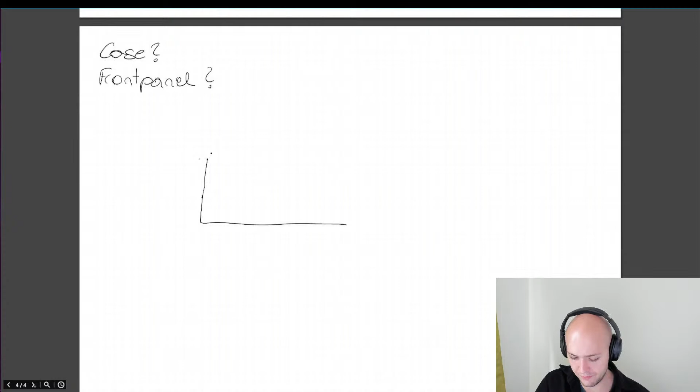We have decided that we want to build an LED controller with kind of a tilted case. If it has this part on the corner, who cares? But it will be some kind of case with an angled front. That's always pretty neat. And what I want to try out, because I haven't done this before, I want to do a front panel PCB. I want to do a front panel, and I will add a PCB behind that panel where I will mount the buttons. So if this is a cut through our enclosure, on the bottom there are the standoffs which are almost always available on such enclosures. We will have there a PCB where all the power electronics lie. So everything that produces a lot of heat will have the option of convecting and cooling itself down.

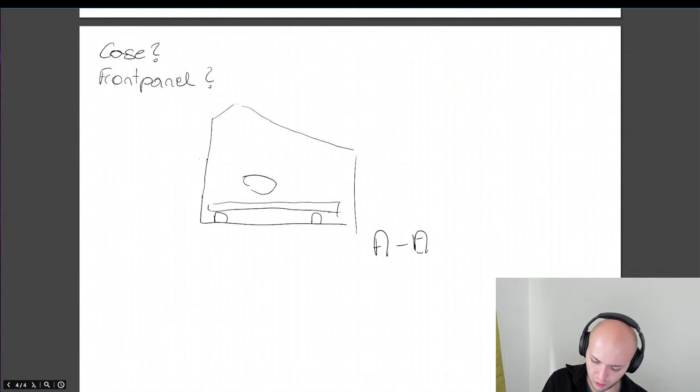Then we will add our front panel, make it a little bit thicker. So this will be our front panel with all the buttons and whatnot. I will draw it differently. We'll draw our front panel like this, and this. And we'll have a PCB with some kind of standoffs. I just realized standoffs have gotten extremely expensive. I never had to buy many of those. And behind that front panel, I will keep the colors. Straight lines don't matter. And behind that, we'll have our PCB, where the buttons and the knobs will stick through, like that or like that.

We didn't specify this before, but the buttons and whatnot don't have to be of high quality. Of course, we could use real switches like those in a keyboard. Those keyboard switches are great, and I would even have some in stock, but at another location. As you notice, we had another location. The postage service did mess up quite a bit, so I was a few weeks without live stream, or 2 weeks, doesn't matter.

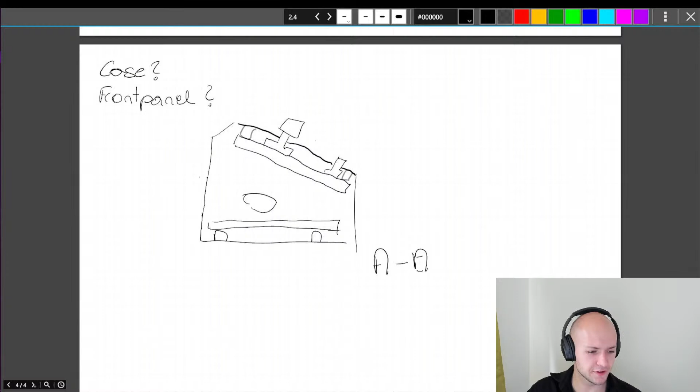And between here and here will be some connector. And if we build it like this, there is one very critical space. That is this one. Because most cases don't give you an easy way to specify this length. Of course, you only use sine or cosine, angle, no problem. But this height can be critical, especially if you are using bigger connectors. For example, I once had a project with this arrangement where we had big front panel stuff, and that can be quite critical if you have densely built your device. But I think we will be fine because we don't have really big devices. We can do almost everything on PCB. We most certainly do everything in SMD.

We will do everything SMD, but not the front panel. The front panel will certainly be through-hole technology because there is no need to do SMD. Maybe a multiplex or something, but that doesn't matter. So we're going to take a look on the market of front panels now, or not front panels. The market on

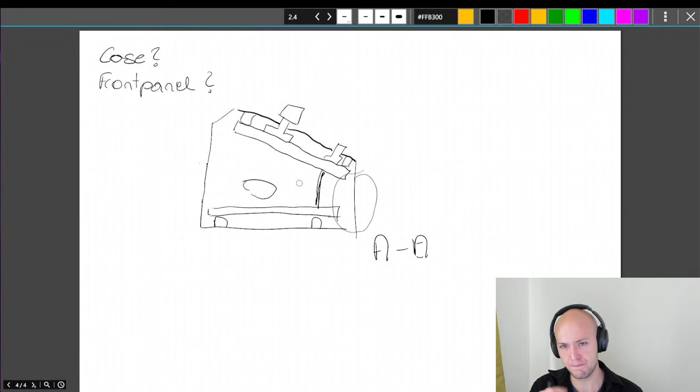Another point, yes. LEDs. What I thought to do, I will do the following. Actually, that's a point where I want to use SMD on the front panel. I want to put the LEDs, the indicator lights, on the front panel PCB. Of course, they will be. And the front panel itself will have no electric stuff.

We have some sort of cutout or some sort of transparent material at that stage. That now sounds pretty complicated, but it actually isn't complicated at all, because you can play around with the copper. If you use a PCB for the front panel, which I certainly do because designing PCBs is okay, I don't need to go to any other program than my EDA package. That is certainly easier than doing something different. It simply is. Okay.

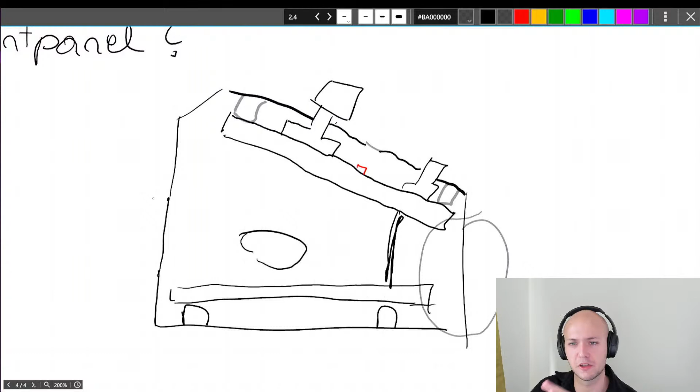So now we can take a look on the market of enclosures and find out what's working or not. Of course, I'm always somehow prepared for the live streams. Otherwise, it feels pretty awkward. And for that, I'll show you how I think you can get a pretty good impression of the market for enclosures. So let me change the. So yeah. That's what I want.

You go on Google, you search for enclosures or the specific kind of enclosures, and then you go on shopping. For example, in Germany, for the enclosure, I will use a German supplier. I will tell you why in a second. Search for Pultgehäuse and go on shopping. And now you get a pretty good overview of nearly every supplier and at least get a feeling of what's available and the price range. In preparation, I first searched the suppliers themselves. And of course, Bopla, Teko, Hammond Manufacturing was another one. Nobody else comes to mind currently.

And we see there are different kinds of Pultgehäuse, of angled enclosures. First of all, we got these very slick ones, obviously designed for battery enclosures. These are also available in a little bit different form, but unfortunately they don't have a front panel by themselves. I would use these if I had a customer who asked me, hey, I want to have a foil display. It's very easy. You search for a supplier for foil displays, you give them the manufacturing data, and then you can simply glue that in.

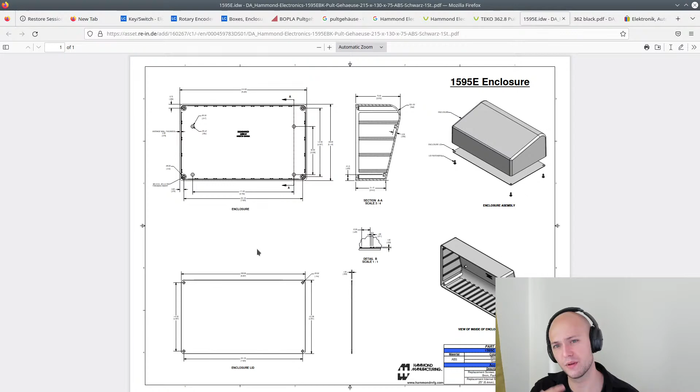I want to get a data sheet to see if there is a bigger difference between those. Which size we use is not that important at this point in time, because we will start building the front panel, or designing the front panel, and designing the power supply circuitry, and then we see which kind of size we will have to work with. Because this is a fun project, we don't have to do so much cramming in and so much try-harding to let our electronics fit - we build something nice. Okay.

One minor annoyance with most of these cases: they have such PCB holders inside them. That's very unappreciative if you want to add some kind of connectors to the back. Normally you think about having a flat surface to add your parts to, because a flat surface is something very appreciative.

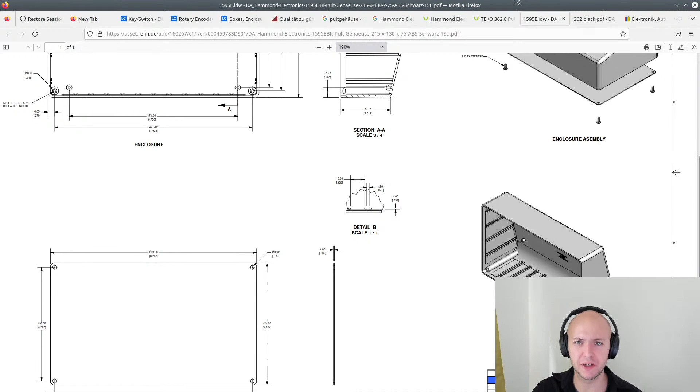With the Teko enclosure, I searched in advance, if I remember correctly - you get those too, but you get way less. So at this enclosure, it gives at least the impression - let me check something - it at least gives you the impression that we are okay with you putting some connectors in. You don't have to grind the whole back of your part. That's something really appreciative, but that's one kind of enclosure I want to use.

Let's talk a little bit about the kind of series Teko, I don't know, 362 series - I'm not quite sure. Let's take a look at how they are numbered. Of course, I already prepared that, because I have actually no real overview of the Teko market itself.

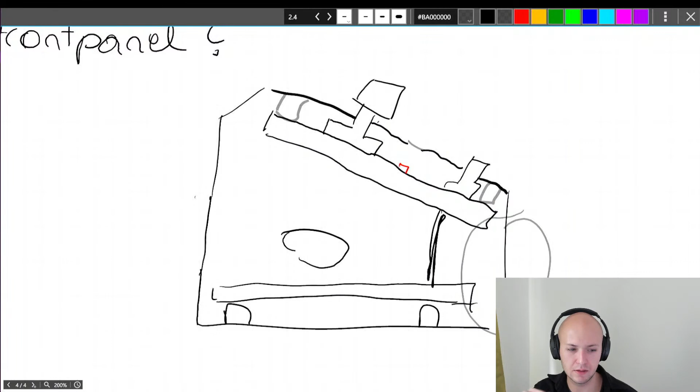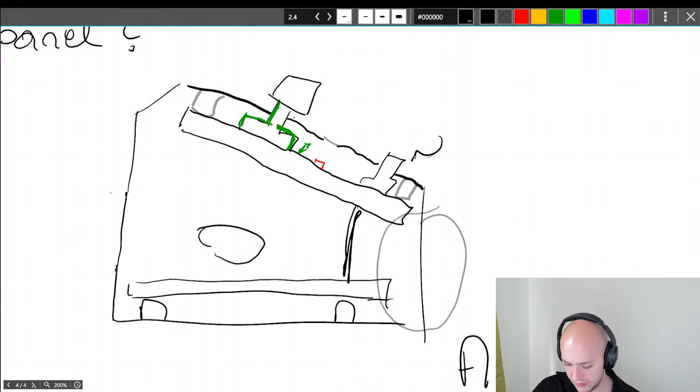Good, the next part would be to find out - a very basic constraint we have is here, because in this area, this part here, so the rotary switch that we're going to use, or encoder, we will build it in to change the RGB values. Very basic idea. But using this kind of arrangement, we need to make sure that the buttons - we have this height by the rotary encoder, and we want to make sure that these buttons here, because normally if you draw them nicely, they look somehow like that.

You have some sort of, yeah, we don't need to use SMD, but they look somehow like that. We need to make sure that this height here, that this button is able to stick out of a PCB. So I have found this correlation.

Based on that height, we can make out what kind of LEDs we need to use, how they spread the light, the angle. What kind of angle? No, that's not the right word. Yeah, we can choose the right spot angle for the LED. Yes.

No idea how you call it in English, I will not look it up. Yeah, to prevent the LEDs from shining on multiple indicator areas. So let's work on that. Let's change.

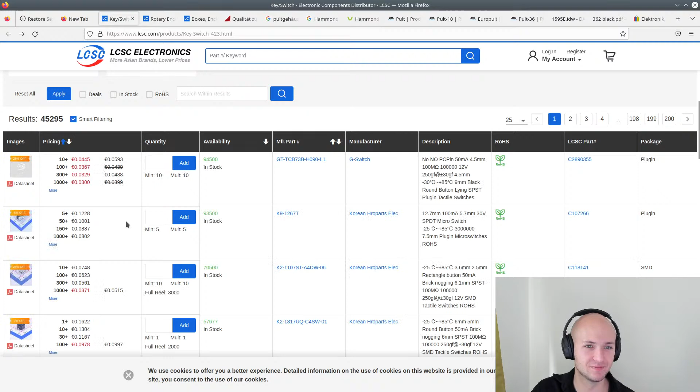Are we in the right... Oh, we are not in the right panel. Rotary encoders here, the price is set up correctly, yes.

So, of course, there are also some quite small ones. We don't care about those. We will go simply by the picture to find the right one, because we want to stay in the relatively cheap area, but we don't want to skimp too much.

So that actually could be a part that we're going to use. But it looks like the shaft looks too small. Size matters in that case. That could be a part because the shaft is long enough so it protrudes a bit, that's okay. That could be an option.

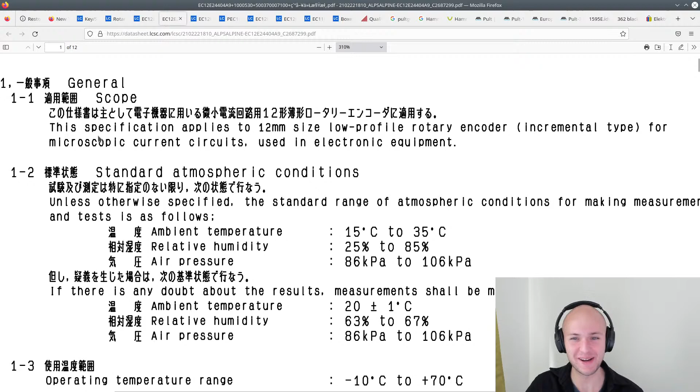Okay, it's built for microscopic current circuits. Let's only use microscopic currents. There are mechanical drawings. Everything's electrical.

Unfortunately, it's... Nope, no idea. That's really unfortunate. Please tell me it's in millimeters. Yeah, it is in millimeters.

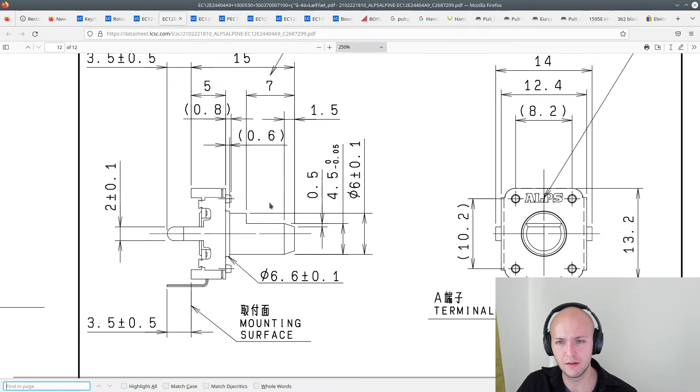That would be a good option, I think, because we have 15 millimeters, not too much. Well, it's allowed to be 15 millimeters because it still needs to protrude the front panel.

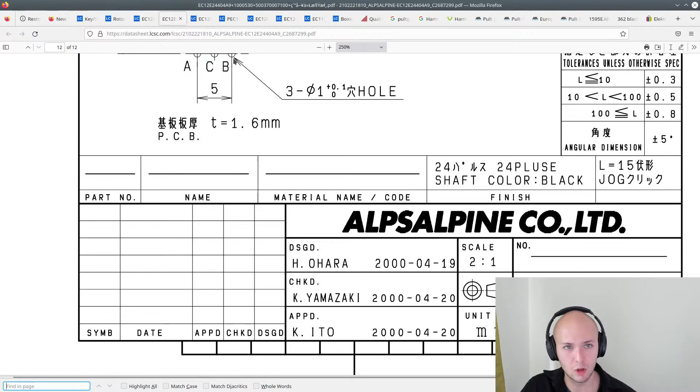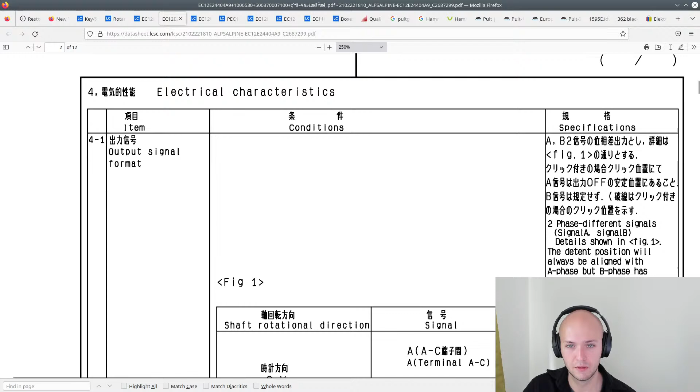Wouldn't see why we can't use that part, but I want to see if those are detented or not. Let's take a look. The detent position will be... Okay, it says it's detented, 24 pulses per 360, okay.

Sliding noise bounce.

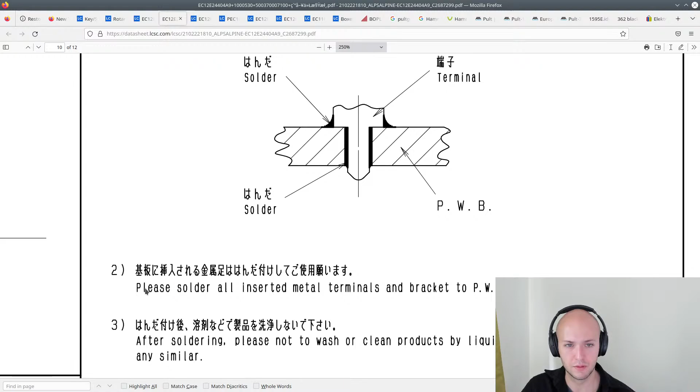Okay, no information, no. We got some soldering instructions, that's okay. Yeah, no real information, unfortunately, or nothing I found. No description. And these, I think that's the same, or effectively the same with... Oh no, it says completely different data sheets.

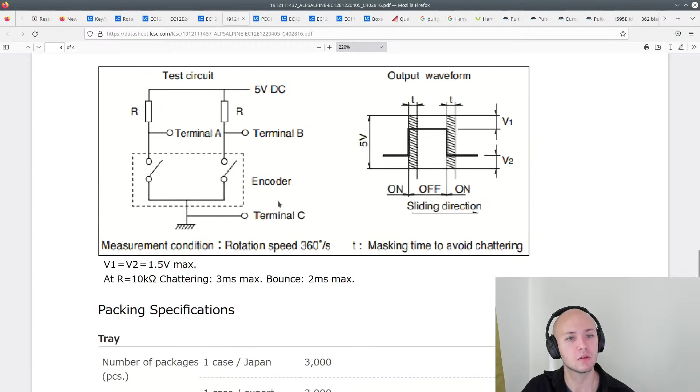Okay, and now we want information on the type of detent. No. Let's take a look here. Maybe the Bourns part has a better description of the actual part.

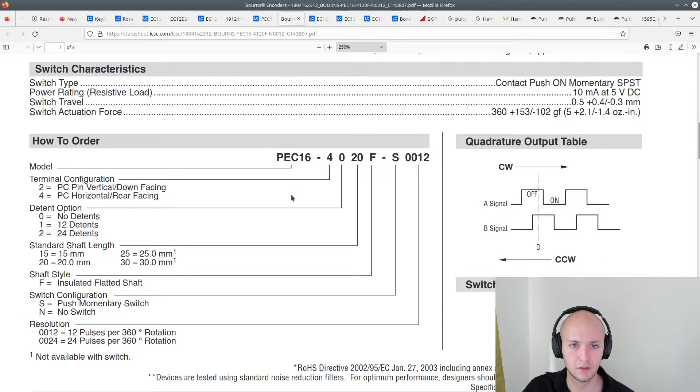Oh, no detents. Here it is. Okay, so the other part will certainly have detents. And this part, the second digit - it is detented, unfortunately, with 12 detents. The other part has 24 detents, which is a bit better. And the shaft length, okay, you get 25 to, do we have here.

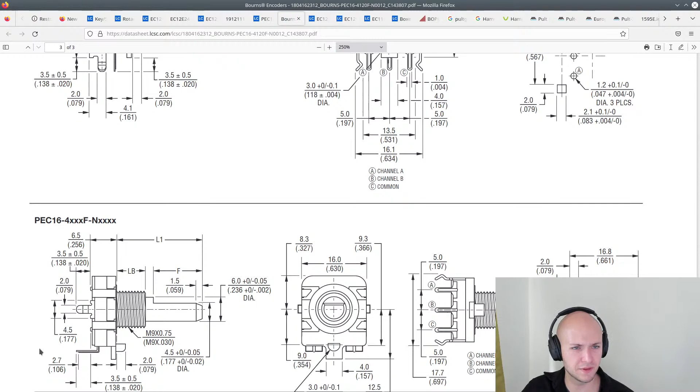FS, what kind of device is that? FN. 4FN. 4FL. We have these dimensions, and we see that it is L1.

Okay, it's 50 millimeters. We could use a screw on the front panel for some more stability, why not. Though that's not really required.

7 millimeters, okay. And LB is 5, and that R is 6.5. Okay. So we will probably need to have at least...

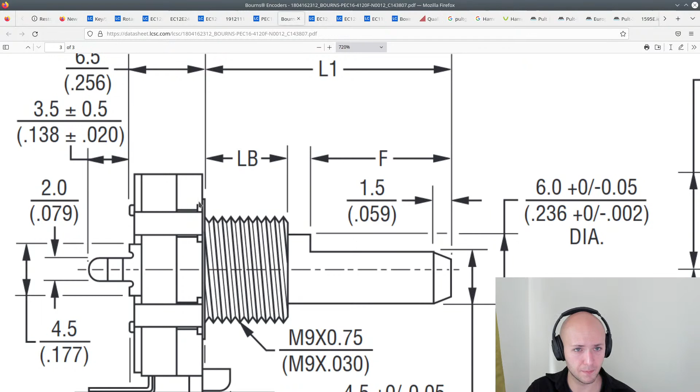So we have this dimension here, and we see that this dimension is critical for us, because that's the dimension from the bottom where the part lays on the PCB till the end. So this point, that's the minimum height requirement we need for switches, or that's the minimum height requirement we need to space our front panel. So we can expect to have 7 to 8 millimeters of space, because we do get a washer.

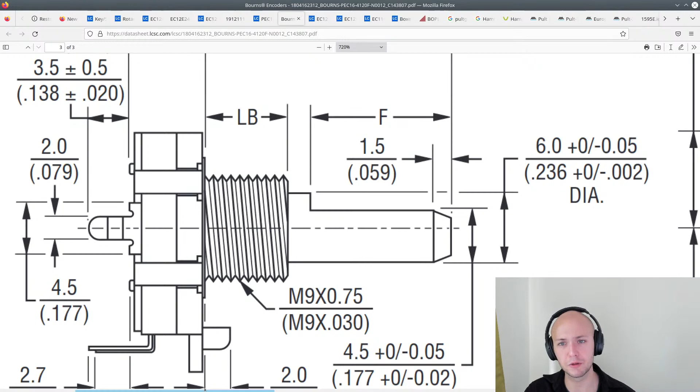Yeah, we don't want to exceed the 6.5 millimeters. So we most probably have a total distance from PCB to front panel, to the front side of the front panel, of 8.1 millimeters, because we have 1.6 millimeter PCB, plus the length of the encoder, and it would be a good idea to have as little space as possible. So we will have about 7 millimeters with this part.

Okay, do these parts bring anything? Okay, it's the same manufacturer and another datasheet design. That's great, I like that. I like that a lot.

Okay, that would most probably be too big. Oh yeah, that would be too big, we don't need to look at this further. But I think we're going to use that Bourns part, it's relatively cheap, we can afford this. But we can even get that with more detents and maybe a push button.

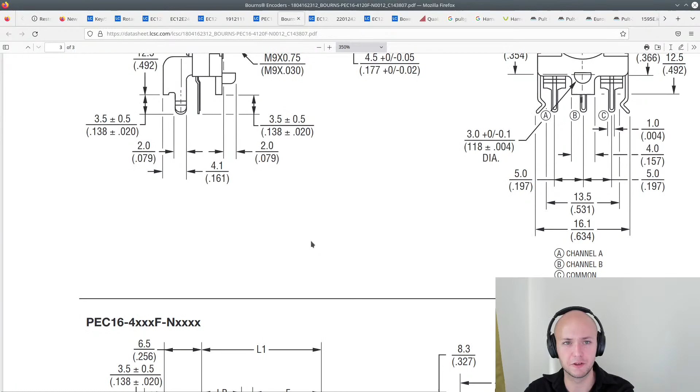That's the nice thing about such a naming scheme - we can immediately find all the other data that we want. So let's take a look. 24 detents. I think a finer detent would be very nice, or no detent.

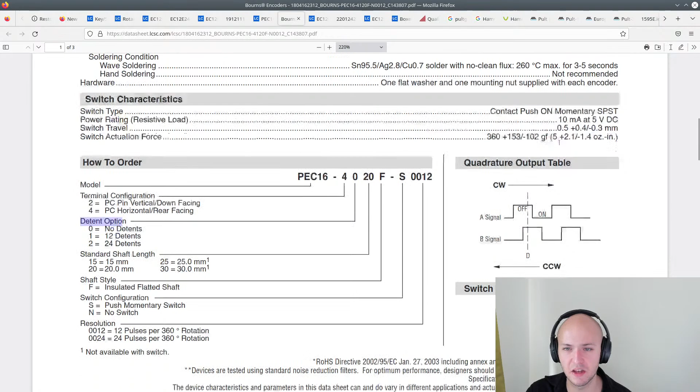So if we would only change that digit, we'd get a finer detent Bourns part. Maybe... okay, we don't have it in stock. Let's do a sanity check - can we get it like this again? Yeah, it works. Let's see if we can get it without detent.

Nope, it looks like it's the only Bourns part they supply, or based on that, the only Bourns part they supply. Okay, no chance. No chance.

Maybe let's take another look at the more sophisticated datasheet we found here. That one - maybe you can find something useful out of that. Short shaft type, through shaft type. And find something with a lot of detents.

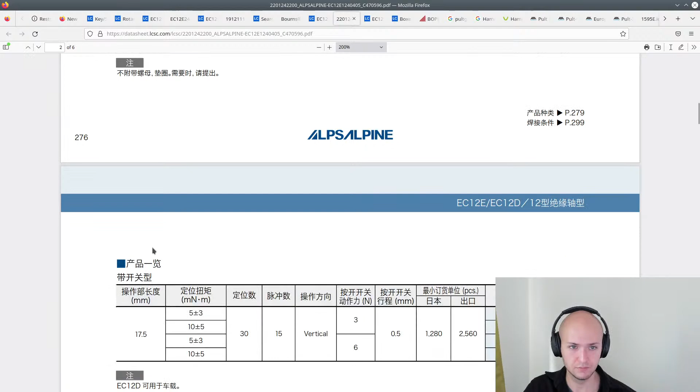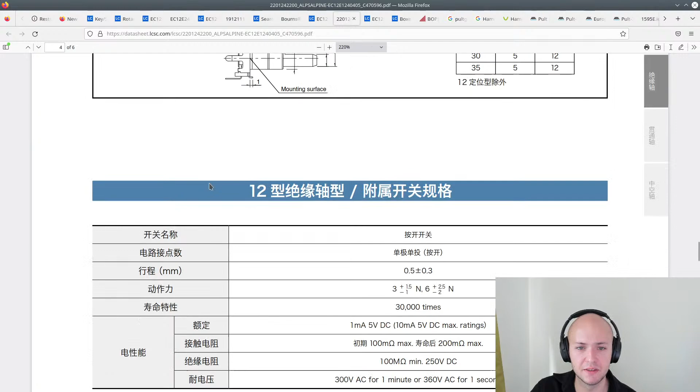And let's take a look. That's okay, 5mm. Do we have some hints on how the model number is constructed? 12mm.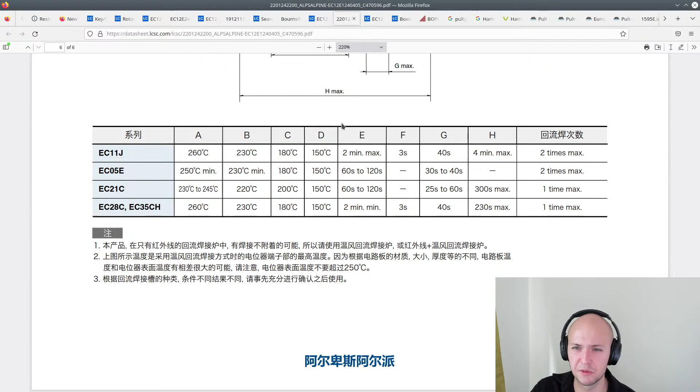Okay, my Chinese is not up to par. Yes. So effectively we have this EC12E series that we could use pretty good for our device. But unfortunately no real hint.

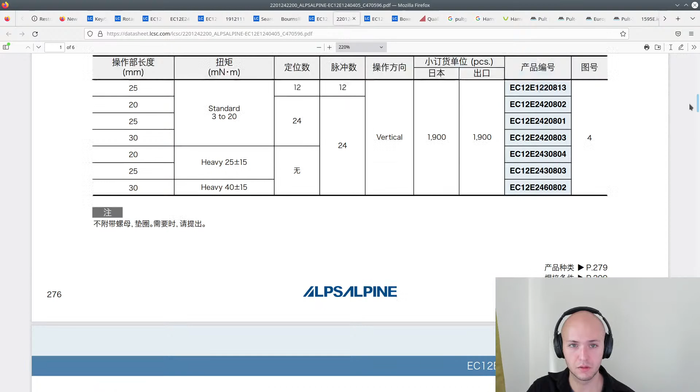Here we go. EC12E 42. What's that? What's that sign? Is it indentless? Is it smooth? What does it mean? I have no idea. Help me. Is it traditional or easy Chinese? Let's try easy one. Okay, so we have a part without indent. That's actually pretty nice. That is pretty nice.

So heavy. That could be a part that could make us happy. But it has a long shaft. Maybe get one with a smaller shaft. Now that's all through shaft. No, we only get that with 12. Okay. Let's take a look. Oh no, that's 20mm. That's okay. We can work with that.

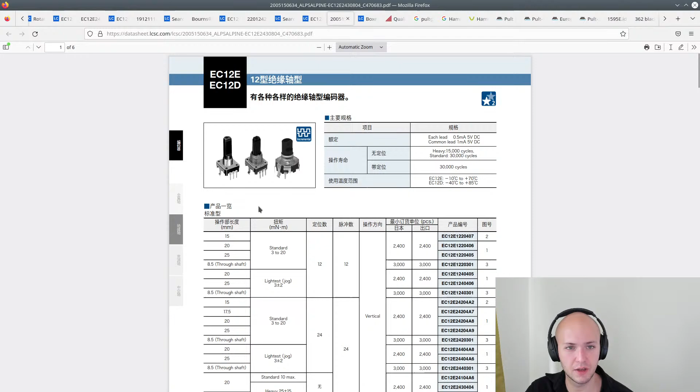Okay, let's see if we got this part on LCSC. Wow, we also got it. Unbelievable, we even got the screw together. That's nice. Okay, you want to get that over your data sheet. They don't have a switch. No, they don't. No, they don't have a switch at all. Okay, no problem. That's definitely a part we want to save.

Maybe you can find that part with a push button switch. Yeah, we see. Now it gets already more expensive. Unfortunately, but yeah, that's how it is. Well, at least we found with the cheaper part the right part we want to find. So without an indent. Yeah, that's nicer, having no indent. Okay, let's see if we can get this with a push switch.

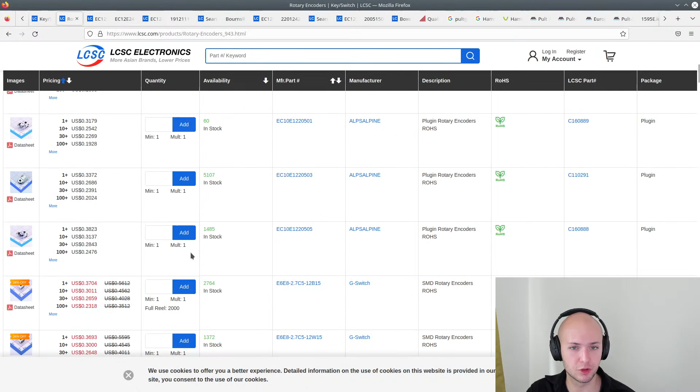Let's stay at Alps Alpine and rotary encoders. Maybe they have some with switches. Let's take a look. One remaining. Okay. Unfortunately, they have no real search function. That's a bummer. Let's see if we find a part number which is completely different from what we have. We don't got that N in the data sheet, did we? No, we don't. But this one won't have one. This one could have one. Let's take a look.

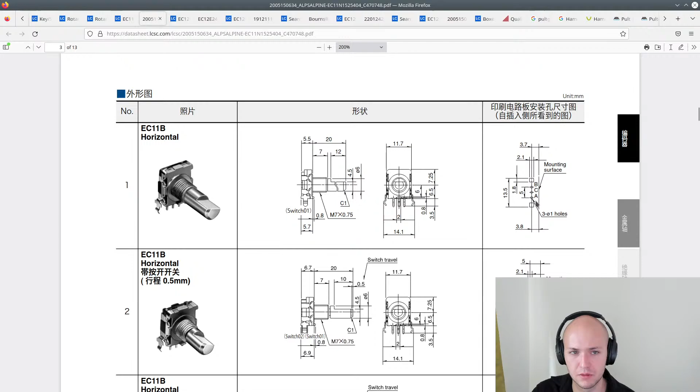Let's take a look, but how expensive are those? Yeah, 244. Now we get in the higher price range. Full metal. Oh no, they are dummies. Surface mount. Okay, you can get them as surface mount. That's nice. Oh my god. I'm going to try something. Let's see if Google Translate can make my life easier.

So, camera. So let's take a look if it makes it easier for us.

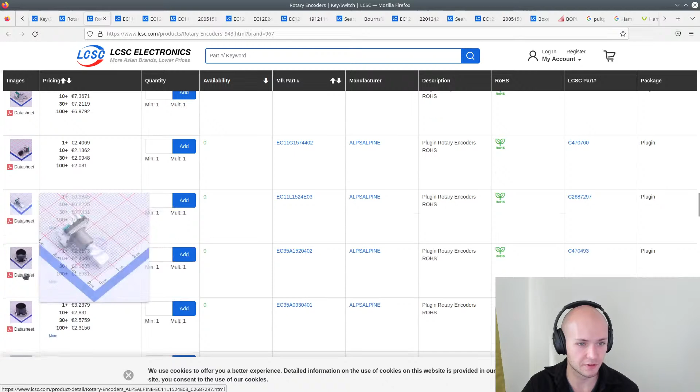€5. Never ever. Nope. Yeah, they are too big. That could be not too expensive. Not the right series. In worst case, we simply leave it out. That's not a big point. Maybe you can find some nicer parts. Nope. Everything too expensive. I don't care about those.

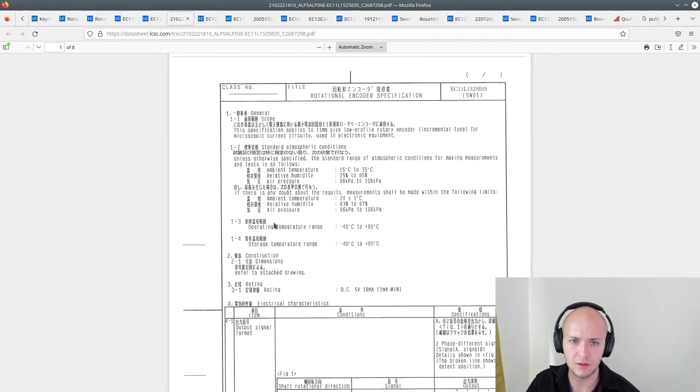They could be EC11. Oh, that could be. Let's take a look at that data sheet. EC11. Okay. That's the standard stuff they wrote. So I think that's a really interesting mounting. You should mount the front panel embedded inside the rotary encoder. Yes, we will do this. Very interesting.

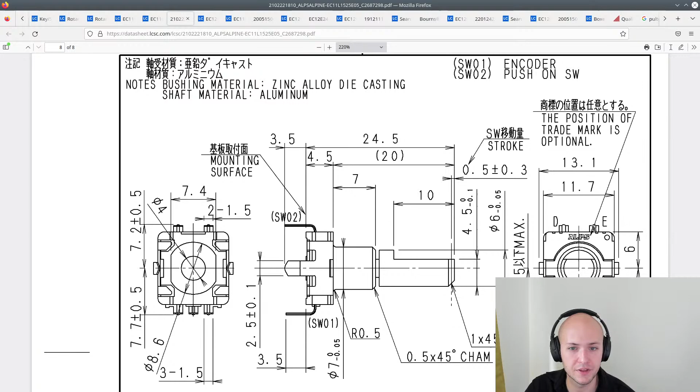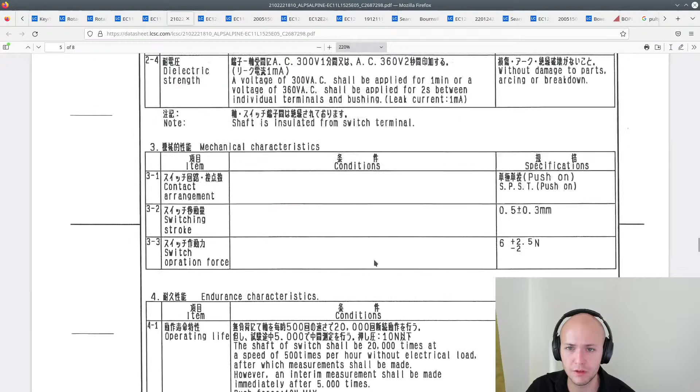Let's see if I have a D and E. What's D and what's E? Switch circuit diagram. Perfect, we have a switch. That's great. We're going to use that one. Do we have detents? That's the next point. Let's see if I put it in here. To be honest, I would rather have indents than have no switch at all. Okay.

30 detents. Number of positions and detents. That's great. 30, that's better than 24. That's good. We're going to use this. Oh, that's hot. Good.

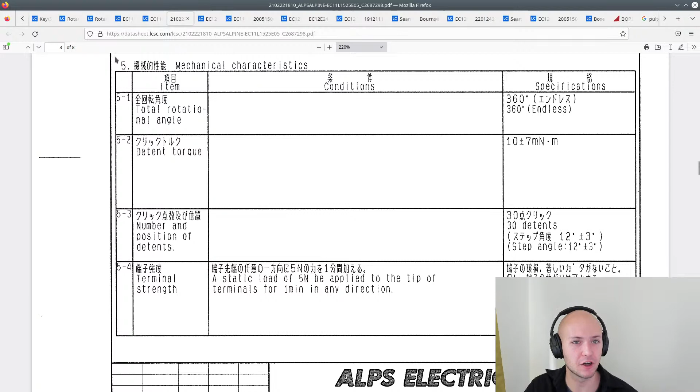I should use this. This is much more appropriate. Okay, I think we found our part. Okay, let's take a look at the height of that part, because then we go very quickly through that and that.

So, stroke. Oh, I don't enjoy this at all. Oh shit. Like, do they mean that's 4.5 and that's 7? So that's 24.5. Okay. So that goes inside. So 4.5 millimeters. And 7. Okay, that's actually even a bit smaller.

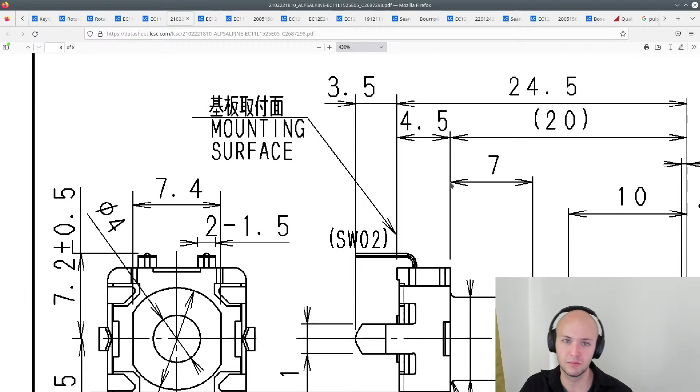So we have... Yeah, it will most probably be around 10 millimeters. So we will have this shaft protruding through the outside of the front panel with those features. So we have a good fit inside the front panel. We will do this. Yes, we will do this. Okay. Yeah, everything looks good. Yep, we're going to use this.

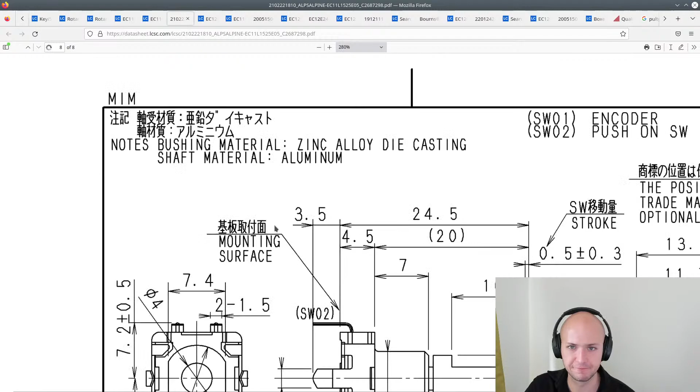That's saved. Okay, after we have gone through the odyssey of searching for a good part, I need to check something. We search for other stuff. We need to take a look at an appropriate push button. I think I have already prepared that. Let's take a look. Boxes, no chance.

Here, one of those cases, 70 euros. Most certainly I would buy that if someone would just pay for this, no problem. But that's not the position I stand on for this project.

So, let's take a look at... nope. Tactile switches, that should be the right one, shouldn't it? Yeah. So, here we'll search for tactile switches. So, we will draw that. We'll do a small drawing so we don't fuck that up.

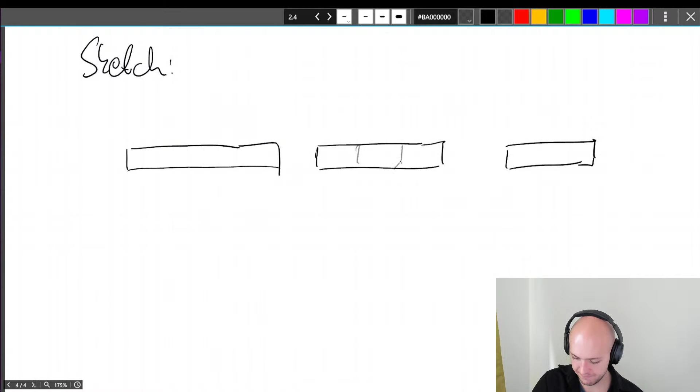That's nicer. So, what we have done, we found this rotary encoder. So, let's make a sketch. So we will have this. That will be our front plate. Draw it like that. And prepare this. Good. And we have our piece as a front plate. And I will change that.

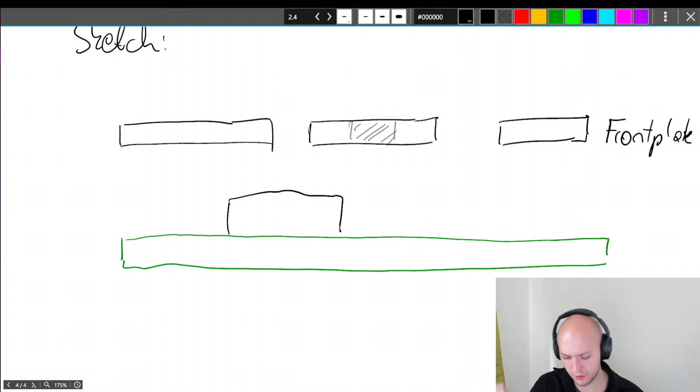So it is not really about doing a to-scale sketch here. That's not proper. We work with the numbers. So we have our part here. Our encoder will look something like that and has a shaft that looks like that. And from that bigger shaft, our cap and so on, but that's not important. We don't care about this.

So besides that, we will have a normal tactile switch. We'll have a tactile switch. That switch will look something like that. So let's check back with the datasheet. Let's check back. That was the one we wanted to use. Yes. Was it 4.5 and 7? Yeah.

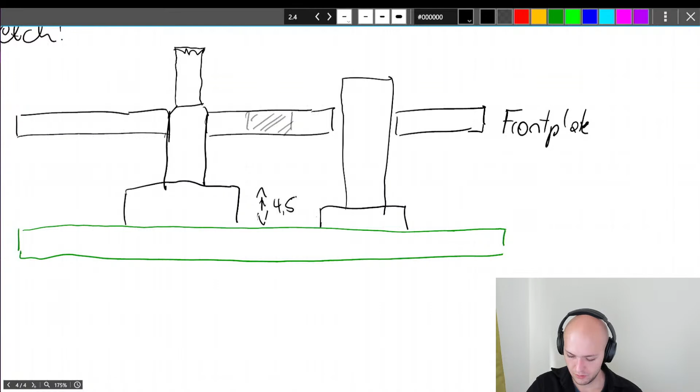So we will change back. So we'll have here a 4.5. That's not good. I'll do it a little bit nicer. So, here 4.5 millimeters. We'll have here 7. And from here we'll have 1.6.

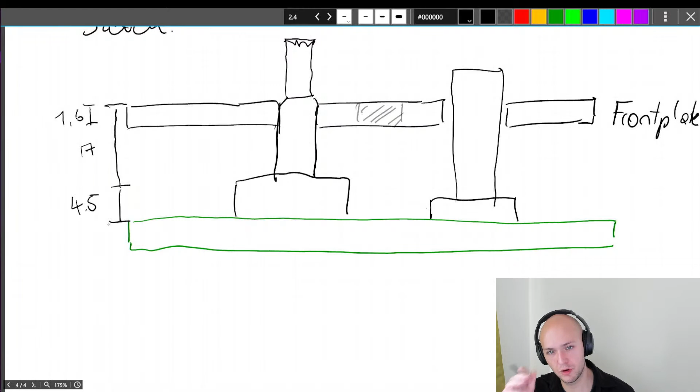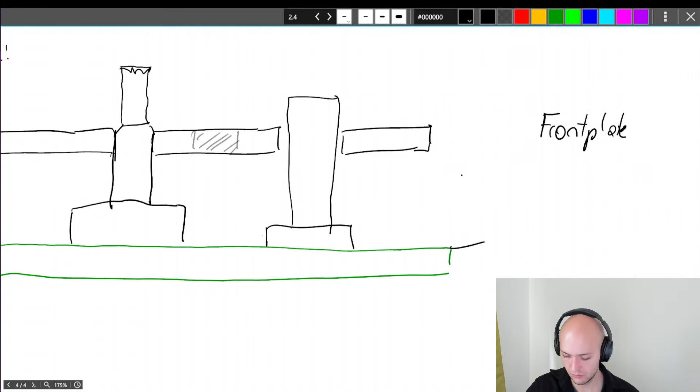The most important fact out of that is that we will have 4.5 plus 7, that's 11.5, minus 1.6, around 9 millimeters. So that will be... 11.5. Then we have 10.7 and minus 1, 9.7 millimeters. Oh, we don't need to specify that.

So we need to make sure that this button is high enough, so we can still push our button. Good. Let's search for a button that is in compliance with this boundary condition. Let's take some more average.

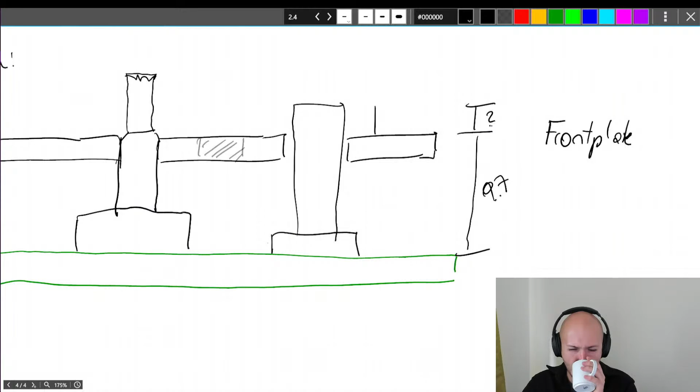Okay, it's not hot enough. That's good. Not too hot.

It is hot enough. Okay, let's take a look here. Tactile switches. Can we search for switch height? That's easy. So we want to have something which is higher than 10. We want to have it protrude a few millimeters. 1 would not be enough. 2, 3, 4, 5. Let's search for 3 millimeters.

Switch height. So we search for 9.5. Everything above. Yep, around 4 millimeters. And take all of them. 240 remaining, that's okay. Okay, let's see what we get. Okay. We can change an option for packaging.

That doesn't help us. We want a round button. We don't want to have squares. Squares are not easy to manufacture. And you want to have it straight. I like my button straight. Okay, let's see. Let's take a look. Okay, they don't bother selling to us under 5 of quantities, that's okay.

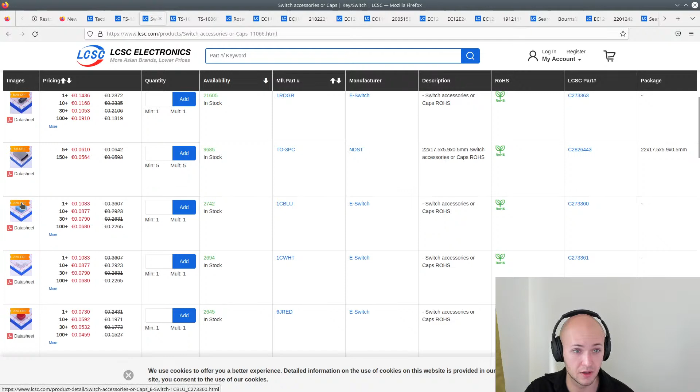Because if we're looking on that kind of switch, which seems a good option, because you have this bigger bottom part, we can take a look on caps. What cap options are available? Maybe in different colors. That's of course very nice. And how much area we need to put on the caps.

They look good. Are there caps from that manufacturer, Yuandi? Let's take a look. Yuandi. I think they will provide caps for sure, don't they? No, they don't. Okay. So no caps from Yuandi. Of course, FPM really expensive. FPM is also resold by Reichelt. I think either a Chinese company or a German one. I don't know. Or a non-Chinese one.

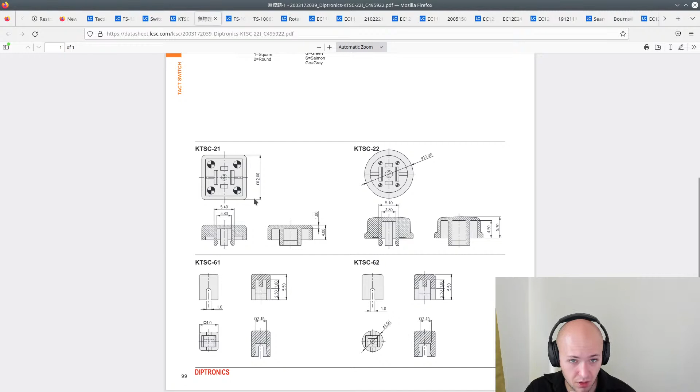So let's take a look. They look good. Are they usable with 6x6 switches? That's the big question. So 13 millimeters in diameter, okay. For 3.8, 5.4. What does our big bottom part switch say? It says it has an upper diameter of... Oh, we have different upper diameters. 3.5 millimeters. Okay.

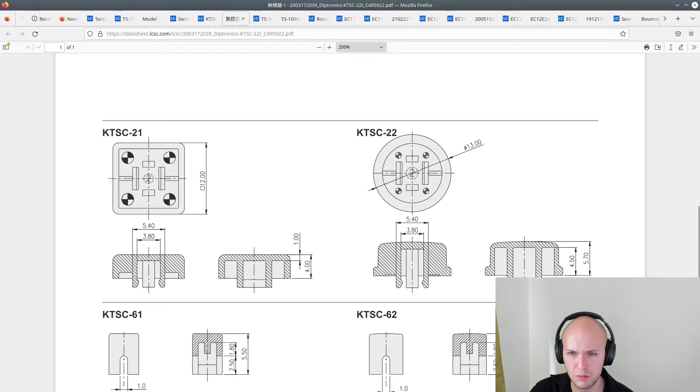So, for using these, that's okay. We will need... Oh. We need a lot of material. We need 5 millimeters for using those caps. That's of course a lot. 2.5, okay. You certainly need more material, but that Yuandi part is also available with higher heights. So it doesn't matter. Actually, they look okay. They look really okay. I want to use those caps with those switches. Of course, we could do a longer market and part search, but there's not much to be gained.

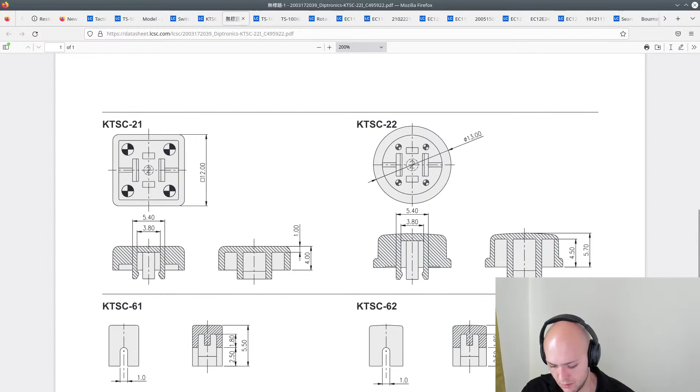Really isn't. So I have 9.7 height. So that height plus how much is that? That is certainly 4.5, more than 4.5. We need to put it down here. So imagine we would need 6 millimeters. Roughly 6 millimeters of switch, that's okay. So 6 millimeters of switch, so you get to 15.7 height. Question is, is here the height? Yeah, from bottom.

There 8, that's okay. So this bottom part will fit under our... we have a 9.7 millimeters height between the top part of the front cover PCB and the bottom part of the front cover itself. That will certainly fit. Yep, we can use those. That looks pretty good. And we use those with A19. How much does TS A19 cost? A19, that's okay. That really looks good. We will save that.

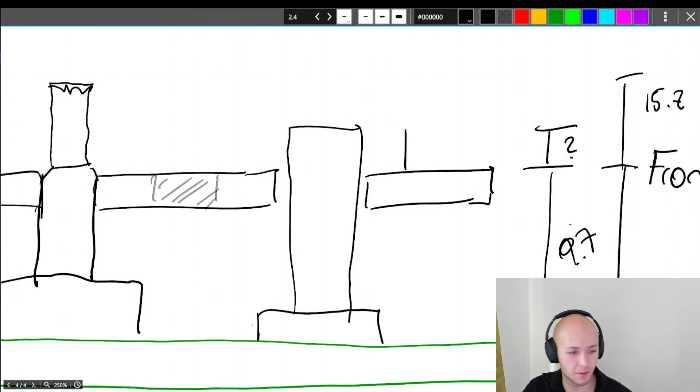Great. So we'll take a look on the PCBs. So, let me change again. Up. Yeah, I really need to stop this live stream. But I want to finish this, that's important, finish stuff.

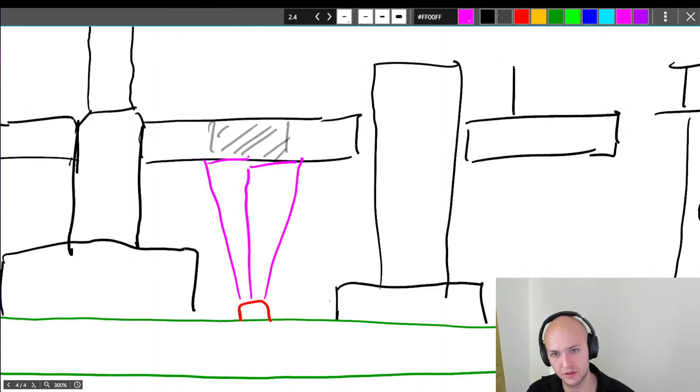So, we want to choose an LED with the right angle. I'll use another color. I use pink, why not? Who cares? So, this LED will have some sort of angle it will emit the light. Depending on the distance between the front cover and the front cover PCB, we need to specify what kind of angle we want, because we get them in pretty different angles, and that's simple. You have triangle times 2.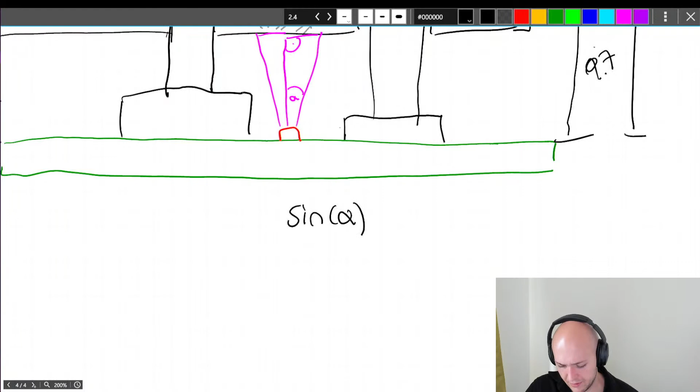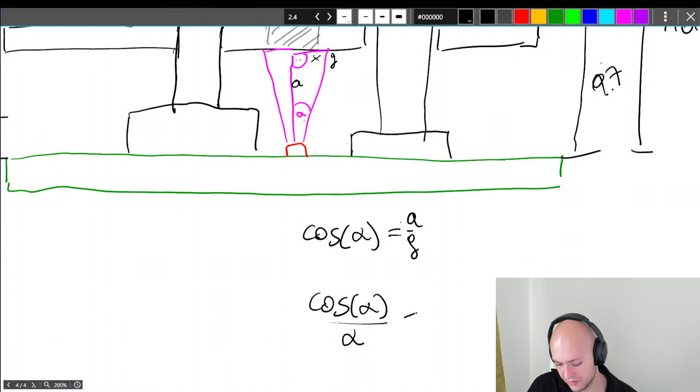Let's take a look if we've done it right. I don't have my calculator here, so we use your favorite search engine. We have cosinus of a certain degree, let's say 30, times 9.7, and times 2 because we have 2, and we have 3 millimeters. Does that make sense? Maybe. So depending on the kind of LED we get, we'll need to use... oh yeah, I didn't change that.

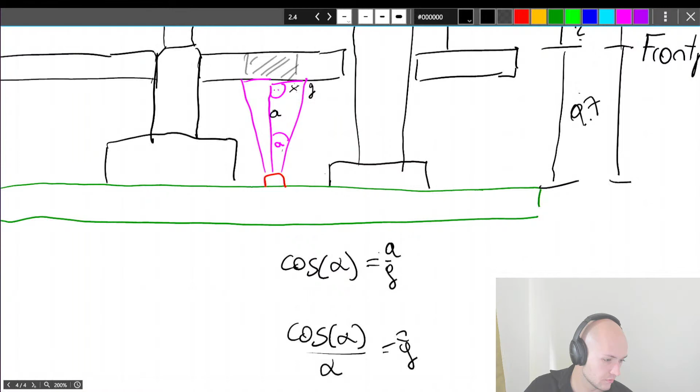So we take the cosinus times, no, I want to divide it, don't I? Yeah, I want to divide it. Now I don't know if it makes sense. 3 millimeters sounded like it would make sense. Nah, no. Does this make sense? No, it doesn't make sense at all. Is that even that? 90 is, oh no. 0.14. Okay, it's radians.

So it's pi through how much? We said 30, for example. So pi/30, it should be... 2 is 180, 4 is 90, and 4 and 6... 360, 180, 90, 45. Let's do 45. Oh, that doesn't look good.

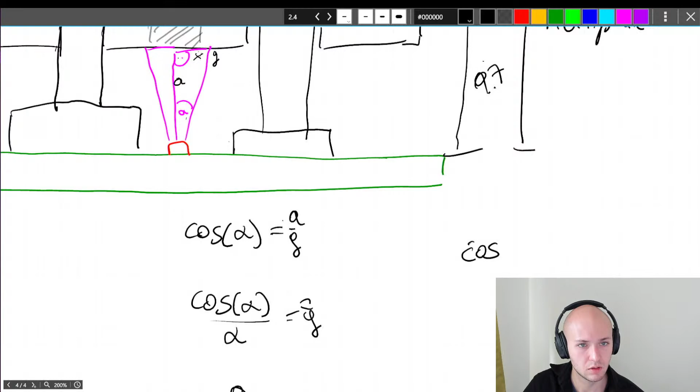Let's take a look. Nixie tube LED driver. Functional modules, Nixie tube, LED display drivers. Nope, nope. Infrared LEDs. Light emitting diodes. And I will change the display. Okay. No, not that one. This one. So let's check for light emitting diodes.

I want to have a very narrow viewing angle. Everything smaller than 30 degrees. Let's see what we get. Not much. Let's see what is available. Package. Is that already filtered? Yeah, it is. Let's take a look at the pictures. Let's sort by price. Okay, the cheapest ones are SMD.

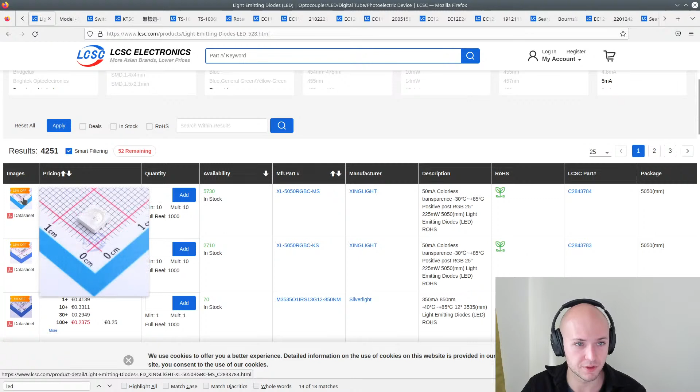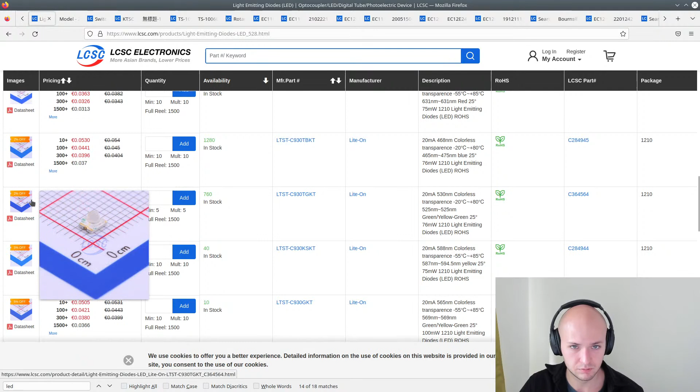So, colorless, transparent, RGB. We don't need RGB really. We need different colors. RGB would be a little bit overkill. Orange, red, blue. That looks good. They have a range of those available. Green. So I have no idea how good this will work. That's something I'm simply going to try out. That looks okay. It's even a name brand, Lite-On SMD LED.

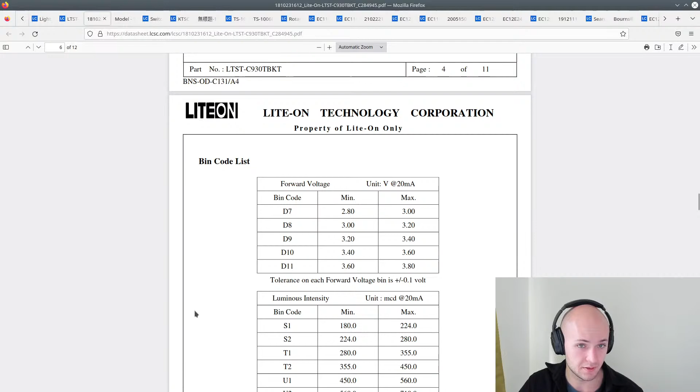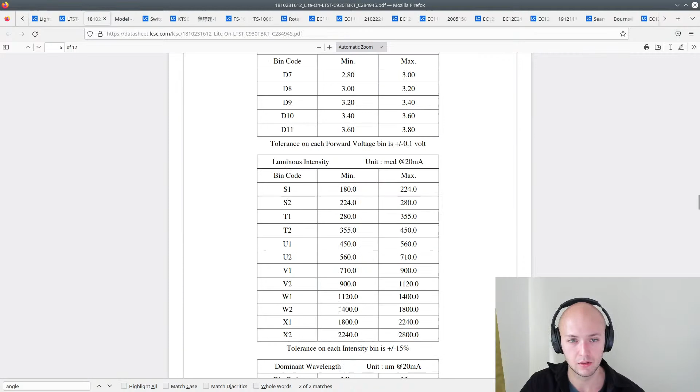Let's check the datasheet if it's really what it's promised. Angle, oh, I can search that, that's great. Viewing angle, 25 degrees. Note 2, figure 6. Take a look at that note. Okay. That's certainly workable. Let's work with those Lite-On parts. How big are they? Yeah, they're reasonably big. That's okay. We're going to use those.

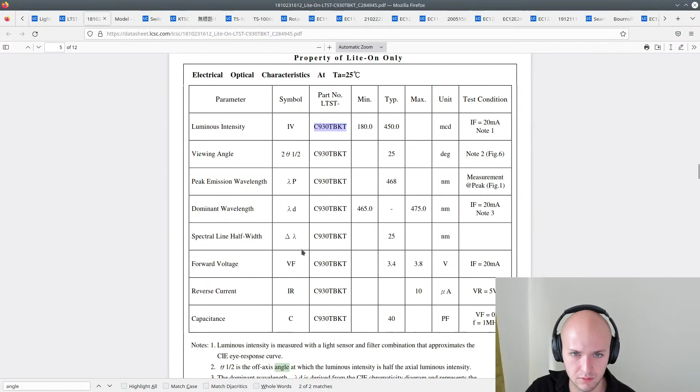I'll bookmark them, or at least bookmark the search result for that series. They certainly have some sort of series, don't they? They do. It's C930TBKT. Let's take a look at the search results. That one, we want to use those. Only two. Then we got more? Or is that another series? 25 degrees, not much remaining. It's okay.

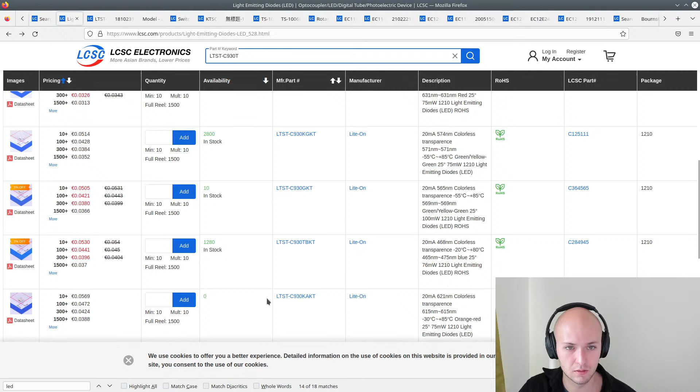Is that already filtered? Yeah, and we want to have Lite-On, please. Let's stick with Lite-On. 10 remaining. C93, it seems like that's the C930 series. That's C950. That is blue, 25. There's a difference between C930 and C950, I want to know that. Was C950 bigger? If they are bigger, I want them, because it's easier to solder.

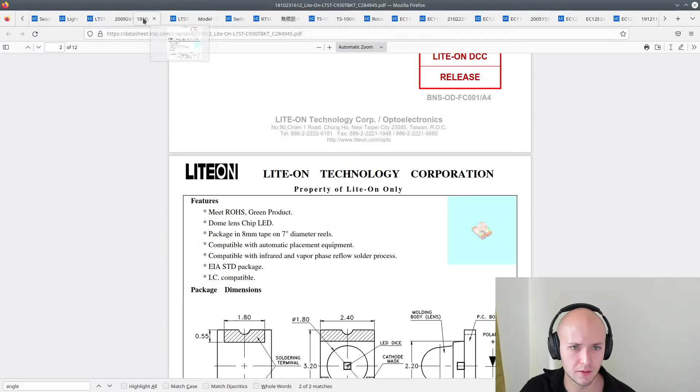The next stream, we will probably take a closer look at the power regulator design, thinking about the efficiency over a voltage range. We will reconsider the power supply circuit and the microcontroller again, because I had some idea to change it.